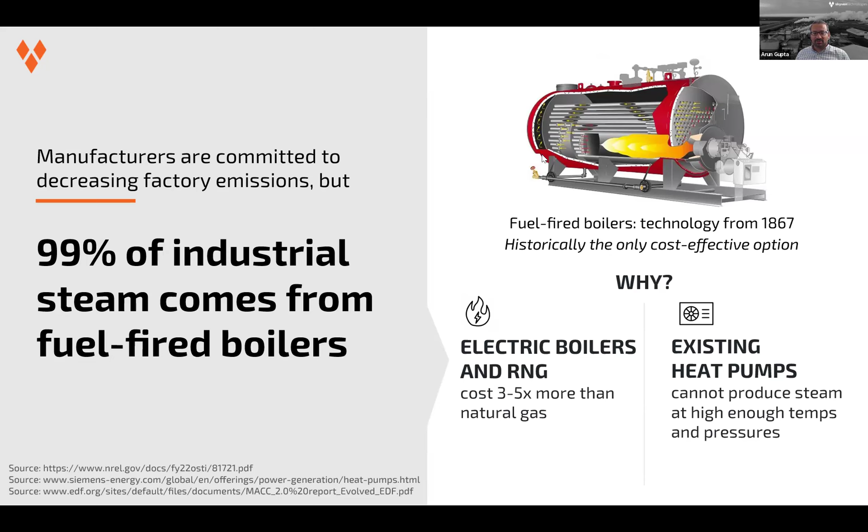And so what we do here at Skyven is we are an energy as a service company, and we're pioneering a proprietary steam generating heat pump technology that delivers clean process steam, so emissions-free steam, to industrial facilities at prices lower than natural gas. Our steam generating heat pump is called Arcturus. This system electrifies steam production, so it consumes electricity rather than natural gas, and in doing so produces the deep decarbonization that is needed to decarbonize industrial steam.

The other thing that's really needed to achieve market adoption is cost savings. Industrial manufacturers love to save money. We all do. And so this system actually produces steam at an all-in price that is lower than natural gas boilers. The reason it's able to do that is it has very high coefficients of performance, or COP, that counteract the difference between electricity and natural gas prices. We all know that gas is cheaper than electricity. But this system is so efficient that it consumes very little electricity compared to the natural gas that a boiler would consume, and in doing so achieves a lower cost point than natural gas boilers.

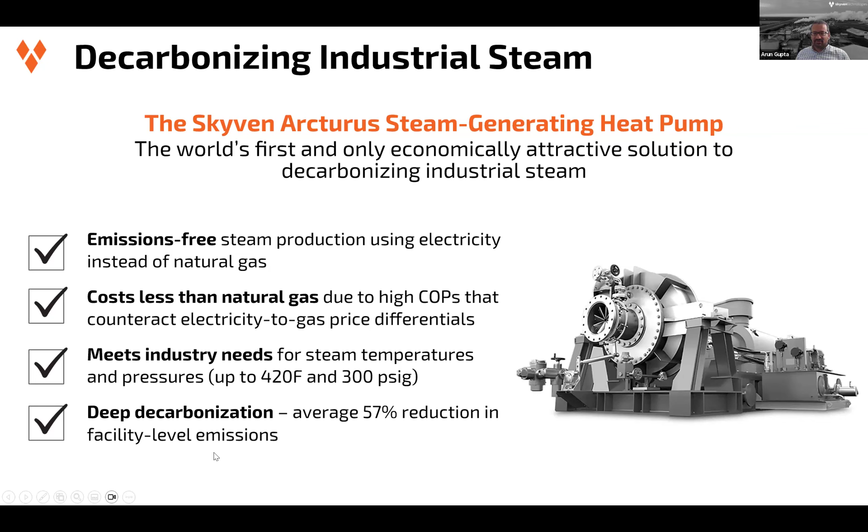Other notes here are that it's able to overcome the limitations of existing heat pumps in that it produces steam at temperatures up to 420 Fahrenheit and pressures up to 300 pounds. So it's able to address the steam needs of major manufacturers across industries such as chemicals, pulp and paper, and food and beverage. And as I mentioned, it achieves a deep decarbonization. We see an average of 57% reduction in facility level emissions across the sites that we work with.

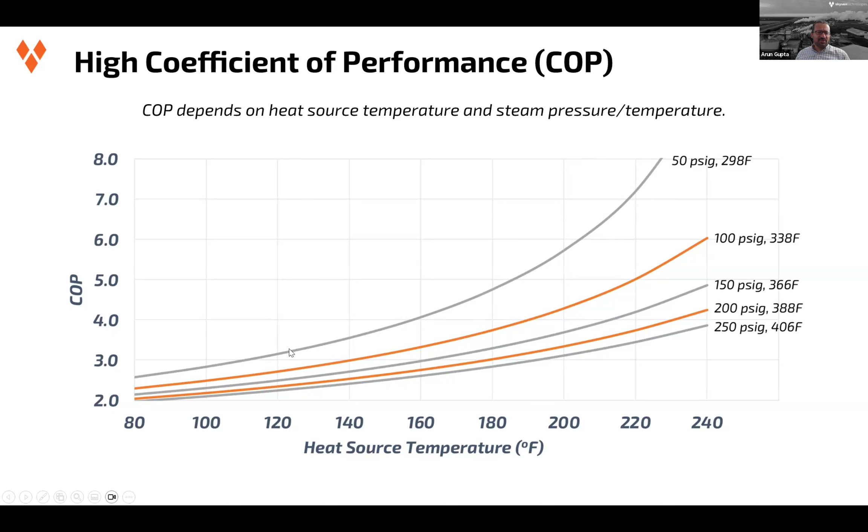So I mentioned a little bit about super high coefficient of performance. This is a chart that shows coefficient of performance is really a function of the temperature of the heat available and also the pressure of the steam. And our coefficient of performance can go as high as 8, which is exceptionally high, under the right conditions, and is generally in the 3-ish range.

So a little bit more about the technology. Hopefully you find this interesting. So this heat pump, the Skyven Arcturus heat pump, is an external bolt-on retrofit that is installed outside the facility on the ground, away from the facility, generally in a field or some open space within the facility grounds where it's out of the way, right? Generally a low traffic area, like the far side of the parking lot, an area that you forget is even part of the plant.

And in doing so, we're able to install this system with little to no interruption of the plant's existing operations, which is super important in manufacturing. They've got to maintain high uptime. They're generally not okay with bringing the plant down or disrupting operations. So we install with no downtime. This is a packaged modular system.

So another thing about this is that oftentimes in industrial, a lot of the industrial efficiency and industrial energy projects end up being bespoke projects that are specific to a given site. That's kind of been the status quo in industrial energy and industrial energy efficiency. That makes these systems really hard to scale. And that's the reason why you might see some plant have some efficiency measure here, but not in the plant next door. It's just all very custom.

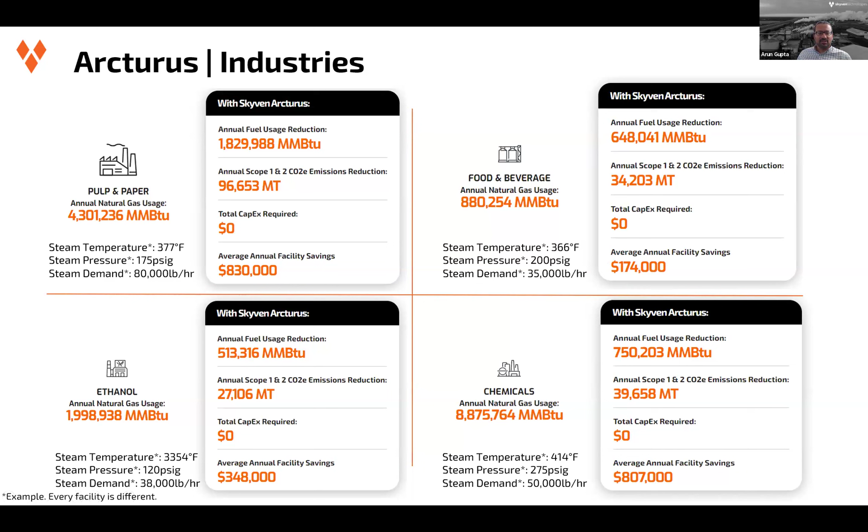So we're talking about a couple $100,000, upwards of $1 million a year in all-in net cost savings, plus tens to up to 100,000 metric tons of CO2 reductions annually, which is pretty enormous.

So, digging into how we do that in a little bit more detail. First, I want to highlight a big opportunity, and that opportunity is related to federal funding under the Inflation Reduction Act, the IRA. So Skyven has been selected to receive a $145 million award under the IRA to fund a portfolio of projects.

It'll be approximately 10 projects that will be funded across multiple states, multiple industries, and multiple companies in order to reduce emissions and really show emissions reductions in a cross-cutting way across industries, as well as benefit communities by improving air quality and creating local jobs.

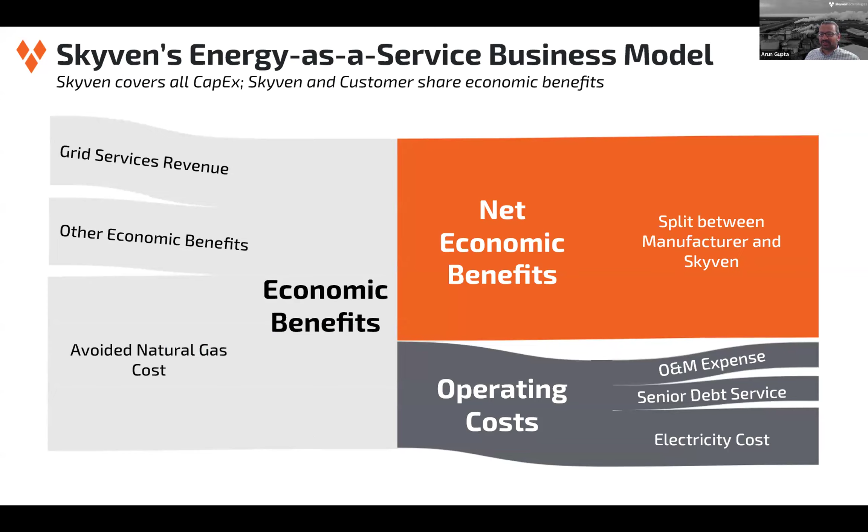And so the way that works is we install this system, kind of going back up to this slide. We install the heat pump as a bolt-on add-on to the existing facility, meaning we do not replace the existing boiler. The existing boiler stays in place. We install our system in parallel or in tandem with the boiler. So in addition to allowing us to be able to install the system with no downtime, the other benefit is that we offer fuel diversity to the manufacturer.

So the manufacturer is now able to produce steam with electricity or natural gas, whatever makes more sense at any given time. And that's especially relevant to the grid, because as the grid gets super congested, and it's 5 p.m. on a hot summer day and everyone's turning on the ACs and cooking dinner and such, the grid gets real backed up and congested. And as a result, you got to turn on these dirty peaker plants that are burning oil and such. Skyven has the ability to turn our heat pump off and immediately remove several megawatts of load off of the grid,

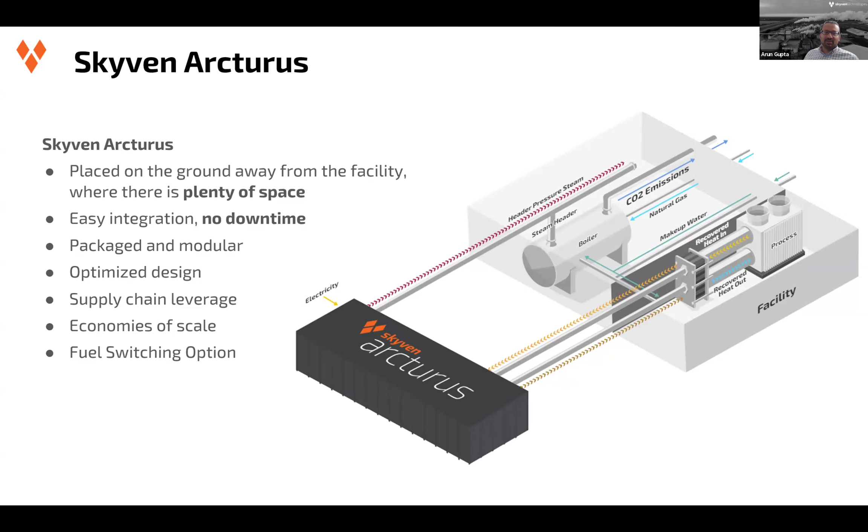helping alleviate grid congestion. And then the other thing that does is allow for deeper penetration of renewable energy onto the grid, because as we all know, renewables are intermittent. They're not always producing, and that creates a challenge for managing the reliability of the grid. And so whenever there is essentially a shortage of electricity available on the grid, Skyven can turn our heat pump off and revert back to existing natural gas boilers and help alleviate those issues.

So a note about how we do that. One of the ways we do that is we use price as a signal. So we look at the real-time electric rates where wholesale electric rates are available. And then we switch the heat pump on or off depending on whether the wholesale electric rate is above or below a switching threshold. So when the grid gets backed up, the real-time electric rates go up, and we turn the heat pump off.

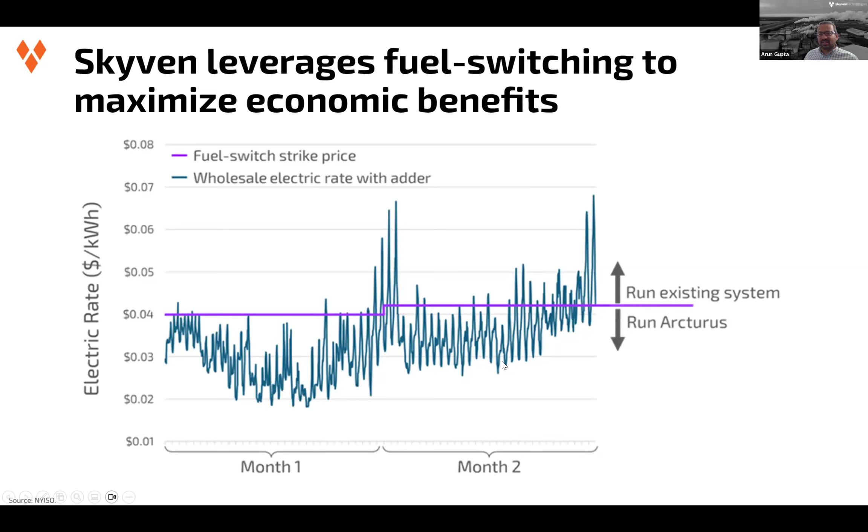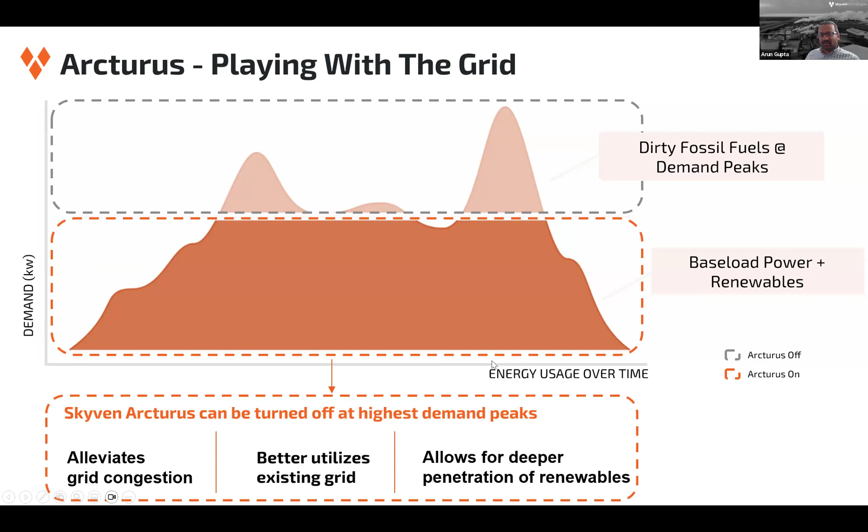So this is actual data. I believe this is from the state of New York over a couple of months, and each one of these spikes is a day. The top of the spike tends to be around 5 p.m. So a little more detail, kind of what I described here. When you've got the peaking loads where we have dirty fossil fuels at demand, we turn the heat pump off to kind of cut out. So it's essentially peak shaving, cut off these peaks, and that produces deeper penetration of renewables and better use of existing grid infrastructure.

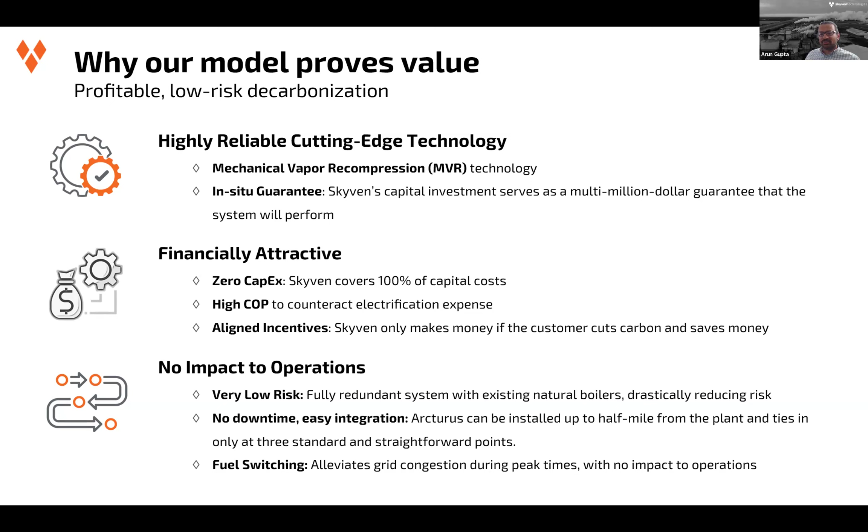So this is just a bit of a summary here of what we talked about. So we got cutting edge tech, attractive financials, including a model that allows us to deploy this with no capital outlay to manufacturing customers. And we do it with no impact to operations. And it provides substantial public benefits, including decarbonization, clean air, deeper penetration of renewables on the grid, and greater grid reliability.

Todd from New York does have a question in the chat. What is typical megawatt size of Arcturus and what voltage is needed to operate? If you could answer that quickly. Yeah, those are great questions. So this system is a good fit for large manufacturing facilities that consume a lot of steam. So sort of minimum size is around 3 megawatts electrical.

And it'll go up to 20, 30 megawatts electrical, and that produces approximately kind of minimum 7 or 8 megawatts thermal, and it'll go up to 70, 80 megawatts thermal. So those are the general ranges. So that's a fit for big plants. It's not a fit for small plants.

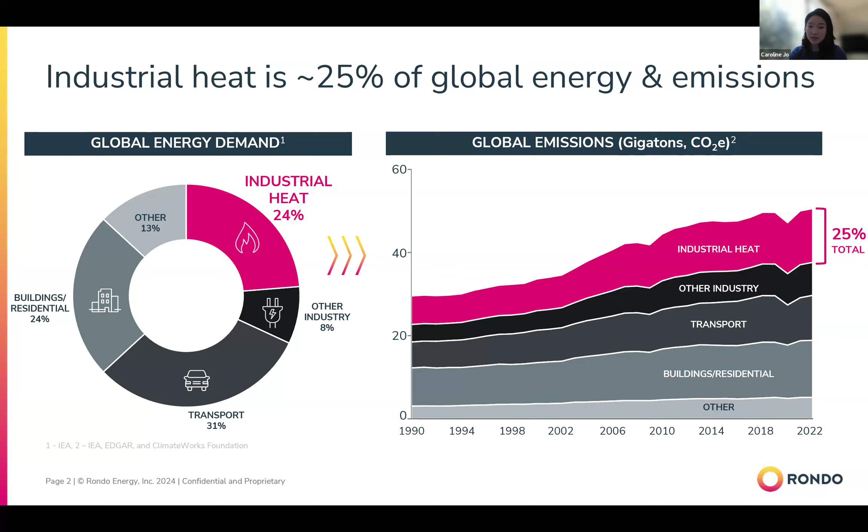And when we got started, really the goal was, how do you tackle the problem that we've typically had with renewables in that they're intermittent? So the concept from the very get-go was industrial customers need heat 24/7. In order to replace that, how do you take intermittent, low-cost renewable energy sources, charge a Rondo Heat Battery or thermal battery, as Rod mentioned, there are several other thermal battery manufacturers out there, and turn that into 24/7 industrial heat, typically steam for industrial customers.

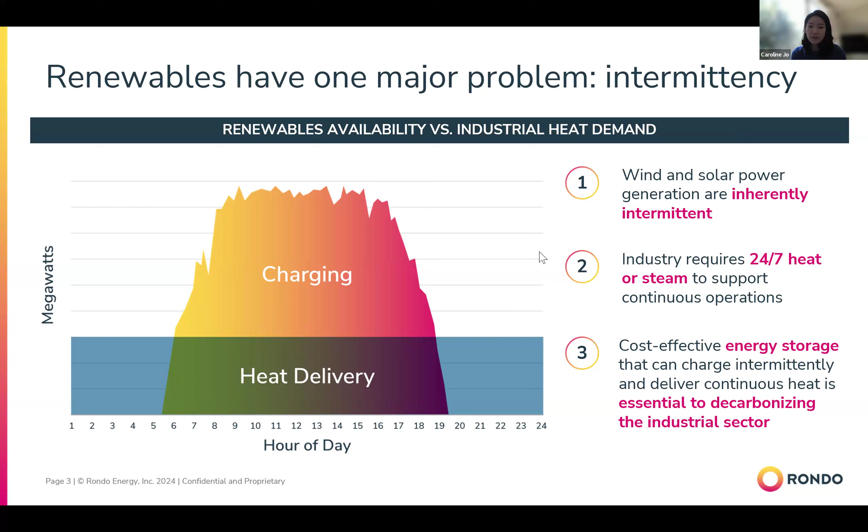So you can imagine when it comes to the core technology, it is a stack of bricks that get very hot, so up to 1500 degrees Celsius, that are being charged by wires not very different from what you see in your toaster oven, just a lot thicker. And if you were to imagine those wires connected to an electricity supply source, they would get very hot, they would radiate heat. And then using that radiation, we're able to get what is a lot of bricks inside this little box, very, very hot.

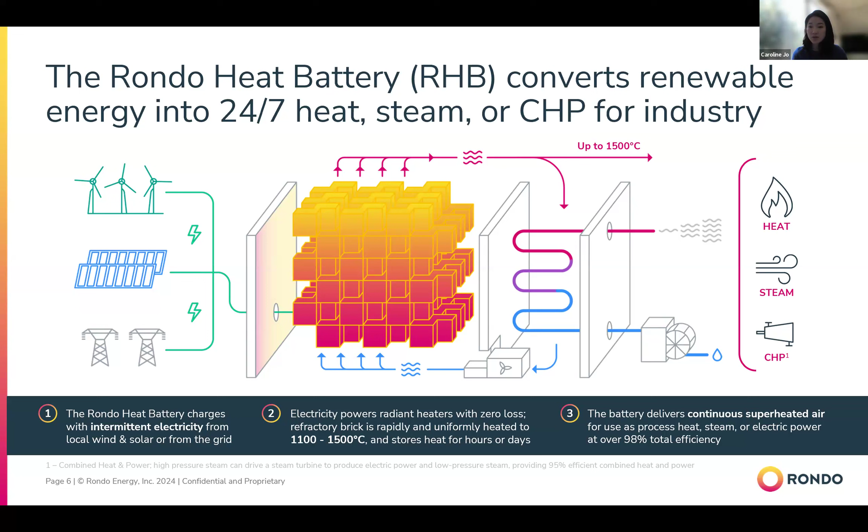The efficiency is a really important one here, as in we are 98% efficient. So every day, if you put in 100 units of energy, we will be able to get 98 units of energy out in the form of heat. And of course, this is because what the industrial customer is looking for is heat, not electricity. And as a result, any energy loss associated with this efficiency really is any heat that is escaping from outside that box that you saw here. So a lot of work was put into making sure it has good insulation to minimize that heat loss that is escaping from the box.

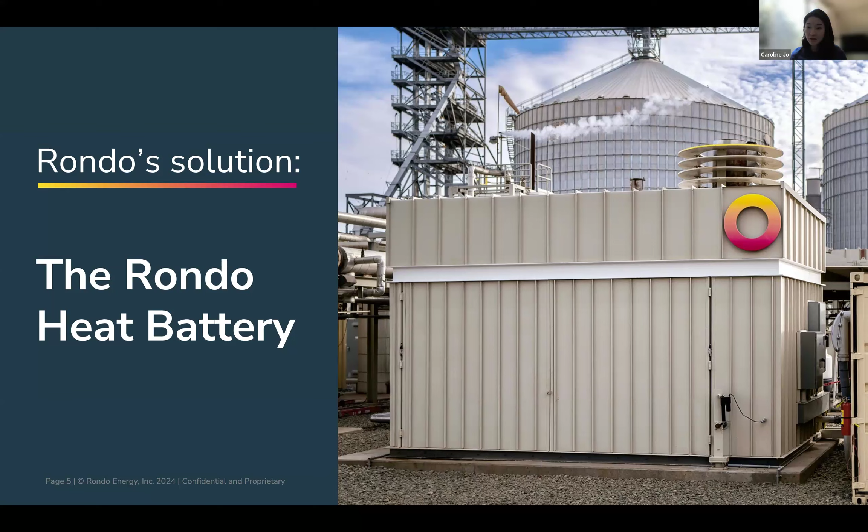You're most welcome to visit. As I mentioned, it's wonderfully anticlimactic. You will land at an airport, drive 4 hours, potentially more, to go to an industrial facility where you'll see a Rondo Heat Battery, and you could touch it. It is not hot because it is efficient. It doesn't make any noise. And we, from the very beginning, designed it to be as least disruptive as possible to an industrial customer. So in this particular case, the industrial plant had no downtime associated with our bringing the system online.

As I mentioned, the scale that we're talking about is quite large. So our two basic units are an RHB 100 or an RHB 300. We're not particularly creative. These are proxies for storage capacity. So around 100 megawatt hours of storage capacity or 300 megawatt hours of storage capacity. And the goal here is to charge quickly. So you imagine we could charge at 20 megawatts for a Rondo Heat Battery 100 and then put out 7 megawatts. Those are max charge and discharge rates. And the goal is to then deliver a 24/7 heat solution to an industrial customer.

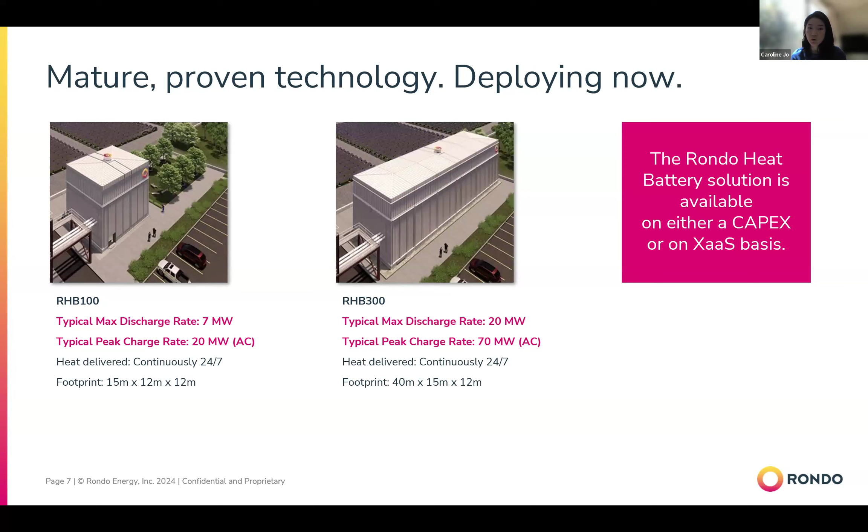As Skyven mentioned, we also have two different models. We have a general CapEx purchase type model when a customer, a large industrial, will say we will just purchase the Rondo Heat Battery. But I'd say another good group of our customers are looking for a financed solution. So similar to how they pay for natural gas on an ongoing basis, they're looking for a way to pay for heat on an ongoing basis, even if it's requiring the capital investment of a Rondo Heat Battery. What that typically looks like is either a storage as a service or heat as a service.

And in some ways, we think of the storage as a service one as a BYOE. So you bring your own electricity. This is much more common, as you could probably imagine, in Europe, where we're also active, where it's easier for customers to procure their own electricity. In fact, in some places in Europe, we've been told that you could even get a 10-year hedge for the 6 cheapest power prices every single day to charge a Rondo Heat Battery.

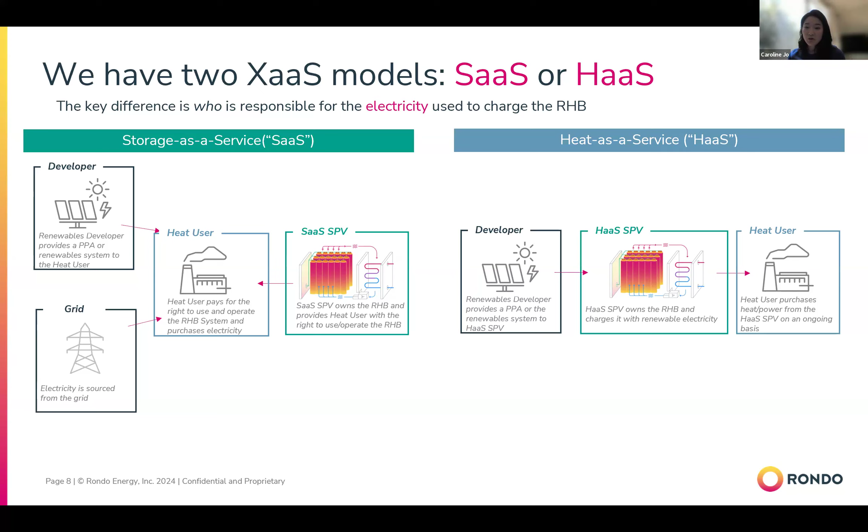In those scenarios, we're looking at a storage as a service type model when a customer will pay monthly fees to pay for the cost of the right to use and operate the Rondo Heat Battery, and they will procure their own electricity. In the heat as a service model, of course, it's more full wrap, as in we are also including and securing the electricity supply ourselves, and then in that way are able to deliver a contract to a customer who's paying on a $1 per megawatt hour thermal delivered basis.

I think, though, what would be helpful, and I'm happy to answer any questions on the technology as well, is really to zoom out a little bit and think through some of the broader implications of thermal batteries, which is what we've been increasingly doing more of these days. And one is, of course, an economic development story. And of course, the DOE has been very involved on this aspect. And thermal batteries, so as Rod mentioned, there are maybe a dozen or two dozen active thermal battery manufacturers out there. And by thermal batteries, I mean electricity in and heat out. That's how we're thinking of thermal batteries.

And in that sense, thermal batteries have gotten a lot of support recently with big industrials integrations. So you can imagine Kraft Heinz, Diageo, Ashland, and Eastman. These are all examples of investments that have gone in order to spur the deployment of thermal batteries across the United States.

It's funny because Diageo is a particularly exciting one because there's 2 states involved, but one of their facilities is at their Bulleit Bourbon facility, and we get a lot of inbound requests asking for site visits. And I always think all of our other sites are also very exciting as well, but that one was a particular crowd pleaser.

But these are all integrations that us and other thermal battery manufacturers are looking at in terms of ensuring points on the scoreboard when it comes to showing the importance of thermal batteries, both for decarbonizing industry as well as some of the grid benefits insofar as it's connected to the grid that they're able to provide.

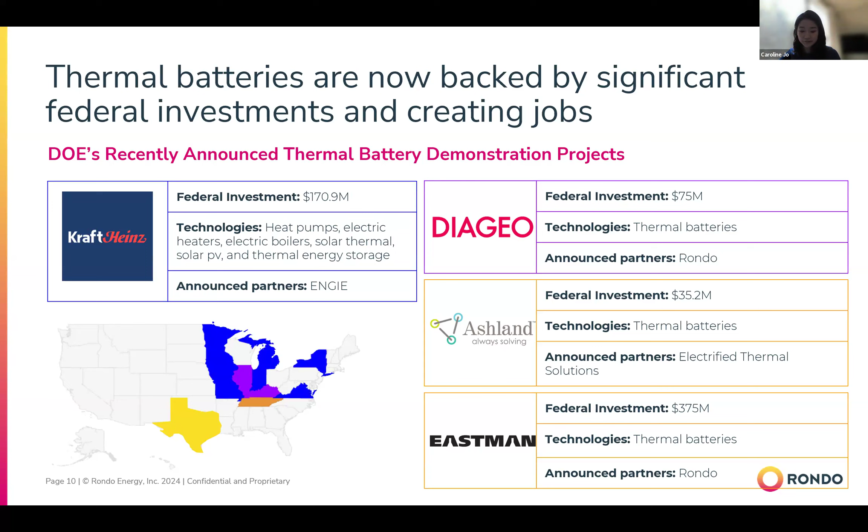And I think taking a pause here, something that has come increasingly more to our attention that we're starting to think more seriously about is how does dispatchable load, for instance, differ from demand response? Often when we speak with a lot of stakeholders, they immediately put us into the demand response bucket. But I think fundamentally what we are proposing here is something different, as in demand response, at least in our experience, is something that you use in, say, 10 emergency hours or 10 emergency events in a year. It's really intended to curtail power consumption demand in emergency situations.

Dispatchable thermal batteries and dispatchable loads are, I think, in many ways, what we are increasingly thinking about when we're talking about the need for flexible loads. As in, these are a new type of asset, when you could, if you wanted to, as a grid operator, for instance, decide the 6 to 8 hours that you would actually want to charge a thermal battery. And it's not intended to be an emergency response type of technology. This is intended to build in base load flexibility into your system. And it doesn't necessarily impinge on the industrial abilities, the ability to actually produce whatever valuable good that they're producing.

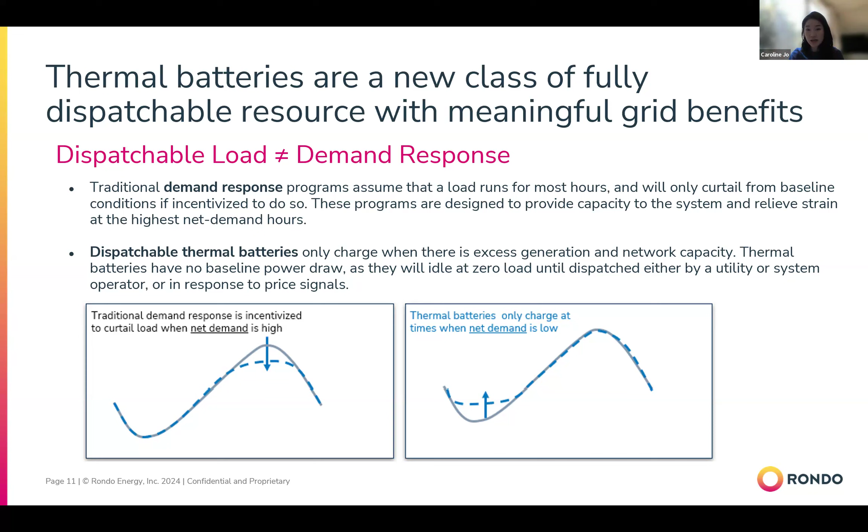With the Rondo Heat Battery, it's designed such that it can be fully dispatchable. A grid operator will be able to decide which 6 to 8 hours that they would like to charge the Rondo Heat Battery. And then using that power, the Rondo Heat Battery will be able to deliver 24/7 heat to an industrial customer. Someone affectionately called us bottom feeders. I'm sure there's a much better way to address what we are trying to do here. But really the goal is to take the valley hours that are least valuable to the grid when the grid is least constrained, as opposed to curtailing demand during those peak hours. So in that way, it's a fundamentally different type of asset that we're thinking about.

And of course, what this practically means is that for this new class of fully dispatchable resources, of which thermal batteries are one, you could add and increase the utilization of the existing system assets without adding to peak load, because it's very much designed to only pull power in non-peak hours.

And the ability to have quick response times: as I mentioned, thermal batteries have different underlying technologies, but in our case, it is a wire that is no different than what you see in a toaster oven, as in you could turn it on and off. We're able to also provide ancillary services. And I think the scale is not something we could understate. Again, in California, it's 20 gigawatts of baseload industrial heat demand.

And it's not just unique to California. Across the United States, when we're talking about industrial customers, often we're talking about around a 3-to-1 or 4-to-1 ratio between their heat demand and their power demand. So the scale of it makes it an incredible opportunity, if we're able to integrate it the right way, for it to be a very flexible asset that could be used by grid operators and utilities, who are currently focused on meeting increasing demand requests and also ensuring reliability.

And of course, it depends on the market, and I mentioned Europe is quite different. In Europe, we could actually set prices and participate in wholesale markets, right? That's not necessarily something that you could do in many places in the US. And that's something that we are increasingly thinking more about, and which will be critical for this whole class of assets that can be responsive to price signals in a very rapid way. So I think that's it for the prepared materials, and happy to answer any questions that you might have on both the technology as well as some of the broader grid benefits.

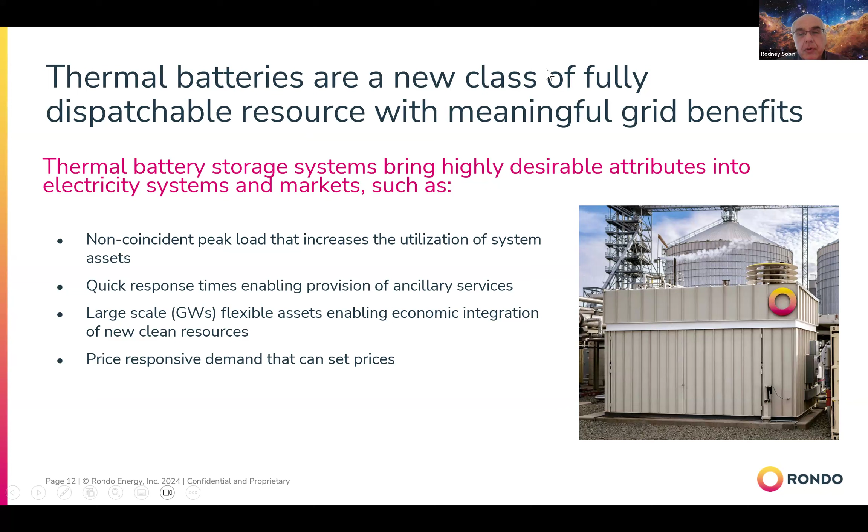Thank you, Caroline. That's wonderful. Both presentations are excellent, and I invite the working group to chime in with questions. But I'll start with a couple, and I think this is for Arun.

We understand, or so we're told, that industrial heat pumps are more widely used in Europe than here. I don't know if any of them are steam generating or not, but for industrial heating, that's still kind of a new or unusual thing here. Do you have an inkling as to why that is so, and what we can do about it to make heat pumps more widely used in American industry? Yeah, absolutely. That's a great question.

So first of all, it is true that heat pumps have greater adoption in Europe. Steam generating heat pumps in particular are a cutting edge technology. So they are new in Europe and in the United States. It's not like they're everywhere in Europe and not anywhere in the United States. There are a few examples that have been deployed in Europe. It's a small handful, and to our knowledge, there are no examples that have been deployed in the US. So there is a little bit more in Europe, but it's not like night and day.